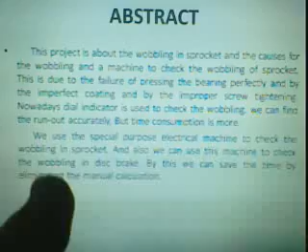This is the abstract. It means this project is about the wobbling in sprocket and the causes for the wobbling, and a machine to check the wobbling of sprocket. If a problem occurs in the sprocket, we should reduce it. How can we reduce the problem? With the help of special purpose electrical machines.

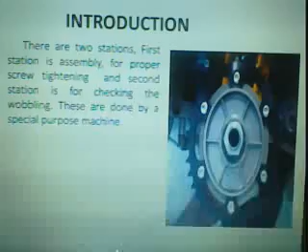This is the introduction. There are two stations we are using in this method. First one is assembly, and another one is checking process.

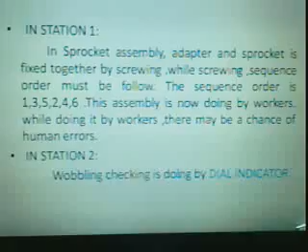What is the existing process? Station 1: in sprocket assembly, adapter and sprocket are joined together by screwing. While screwing, the sequence order must be followed. If the sequence order is followed, there is no problem in 99% of cases in station 1. But if we are not following the sequence order, a problem will occur. There may be a chance of human error.

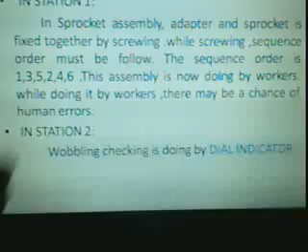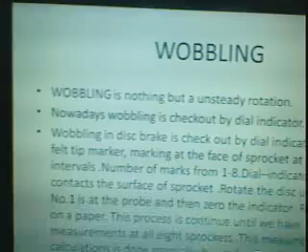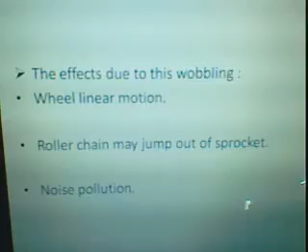Nowadays wobbling is checked out by a dial indicator. The effect due to this wobbling is wheel linear motion and noise pollution, and the roller chain may jump out of the sprocket. This is the root cause analysis.

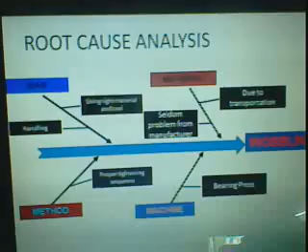How do we do this method? We have to find the analysis of how this problem occurs, meaning we can find the solutions where this problem is acquired. The 4 M's are man, material, method, machines. Among this process we can use method. The problem is found to be in method and in bearing press.

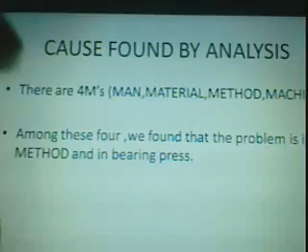So the objective, our aim, is to avoid the wobbling and produce an effective sprocket assembly. The proposed system uses these components: displacement sensor, proximity sensor, electromechanical, pneumatic cylinder, solenoid valve.

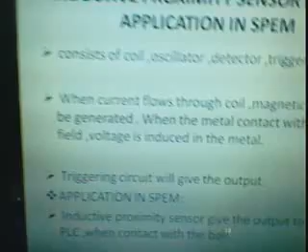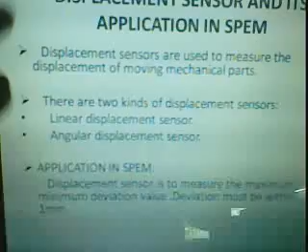This is a displacement sensor, used to measure the displacement of moving mechanical parts. If I am tightening the screws, the screw's metal pressure goes to the displacement sensor, and the signal is converted and goes to the PLC, which consumes the signal from the displacement sensor.

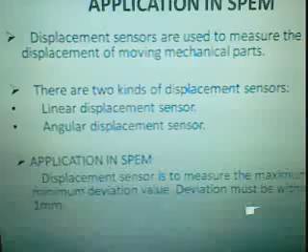There are two kinds of displacement sensors: linear displacement sensor and angular displacement sensor. The application of the displacement sensor is to measure the maximum and minimum deviation values.

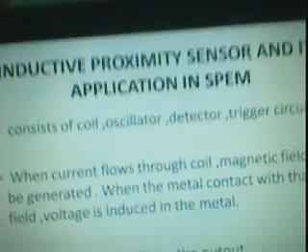The inductive proximity sensor: when current flows through the coil, a magnetic field is generated. When metal contacts that field, voltage is induced in the metal.

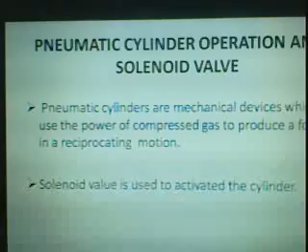The DC motor, you already know that. The pneumatic cylinder is nothing but a mechanical device which uses the power of compressed gas to produce a force in reciprocating motion.

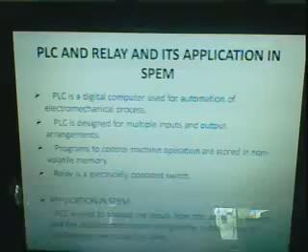The PLC is a digital computer used for automation. We have to give more inputs and receive more outputs. This is only a priority method we can use with the PLC.

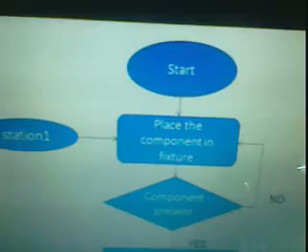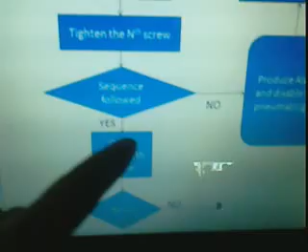We have to follow the sequence order: first we should tighten screw number 1, apply Loctite, and tighten the nth screw. If the sequence order is followed, it goes to the next level. If not, it produces an alarm, and only the supervisor can reset the key.

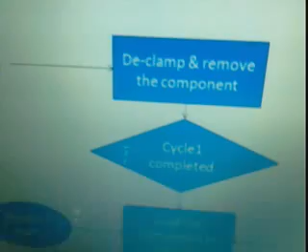Then declamp and remove: if it is clamped perfectly, we can declamp and remove the component. Cycle 1 is completed, load the component, and test for ring component presence. If yes, clamp the component; if no, restart the process.

Couple the component with the motor and press the cycle start button. The motor starts and completes one revolution. Result equals maximum minus minimum, and the result should be less than 1 millimeter.

Then make a punch mark, declamp, and reset the cycle. If the result is no good, an error alarm and indication occurs, we don't punch, and the program stops completely. The result means the sequence order is followed with the help of the special purpose electrical machine.

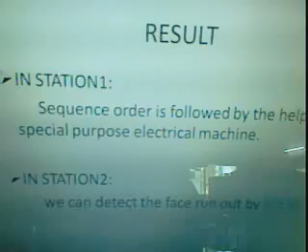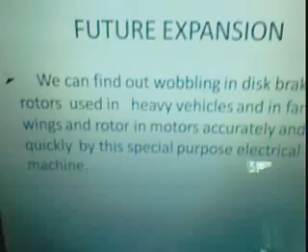In station 2, we can detect the face runout by the special electrical machine. In conclusion, with the help of this special electrical machine, wobbling should be avoided 100% with this method. As a future expansion, we can find out the wobbling in disc brakes. If we follow the sequence order, wobbling is fully reduced.

Now I am going to explain the hardware and show how it is working. In station 1, we can't do the hardware demonstration; in station 2, we can. That's why we only did the hardware demonstration in station 2.

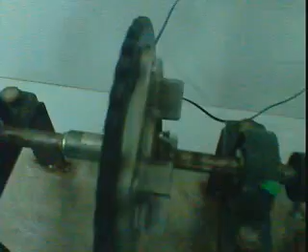If the sprocket is rotating, we can't tell if it's wobbling or not just by looking. With this special purpose electrical machine, we can easily find out if it is wobbling or not. This is a sprocket and this is a DC motor, 12 volt supply and 60 RPM.

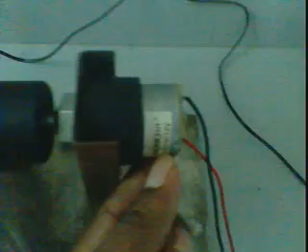This is a microcontroller, PIC16F870. This is the display, a 7-segment display, and then a current transformer. This is an LDR, light dependent resistor.

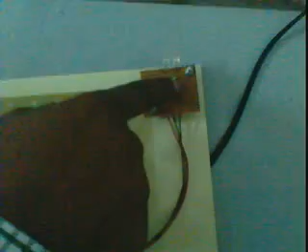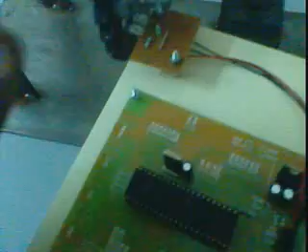If the sprocket is rotating and wobbling is acquired, I am going to check it: the LDR will indicate that wobbling is acquired, and the loudspeaker alarm will indicate it.

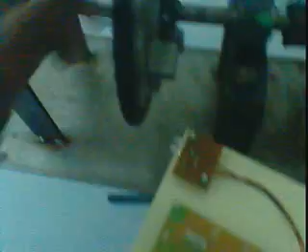If the deviation is within 1 mm, there is no wobbling in this sprocket, no problem, and we can't find any error. So the LDR is an important component in this project.